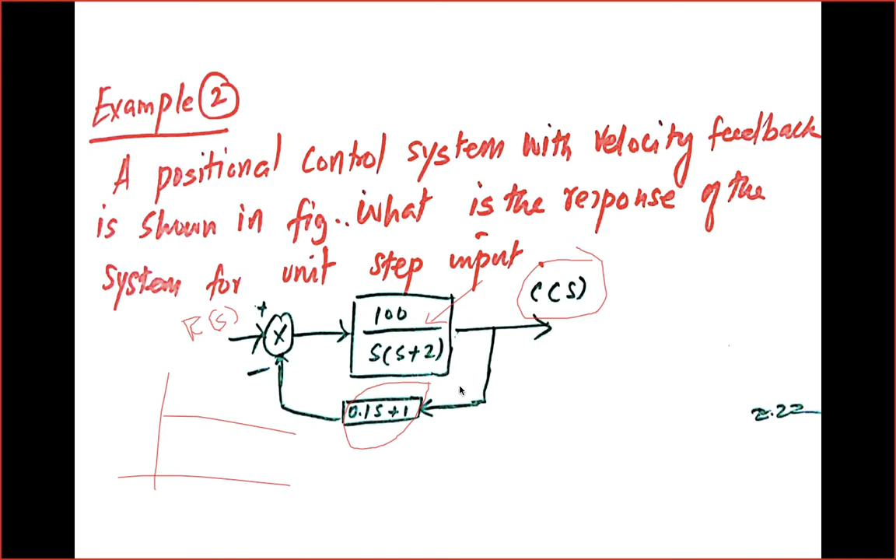So for the closed loop transfer function, we have been using this standard formula. This is the formula to find out the closed loop transfer function for the given block diagram.

So the closed loop transfer function is given by C of s by R of s is equal to G of s divided by 1 plus G of s into H of s. Here G of s is the open loop transfer function and H of s the feedback. So the open loop transfer function is already given in the problem, the block diagram.

G of s is equal to 100 divided by s into s plus 2, and H of s is also given. It is not unity feedback, the feedback is different. Now H of s is equal to 0.1 s plus 1. Now we are going to find out the transfer function, that is, we are going to substitute G of s and H of s in this equation, C of s by R of s is equal to G of s divided by 1 plus G of s into H of s.

When you substitute these two things in this equation, we will get C of s by R of s is equal to 100 divided by s into s plus 2, divided by 1 plus 100 divided by s into s plus 2 into 0.1 s plus 1. This is G of s and this is H of s. So now we need to cross multiply and cancel the common terms.

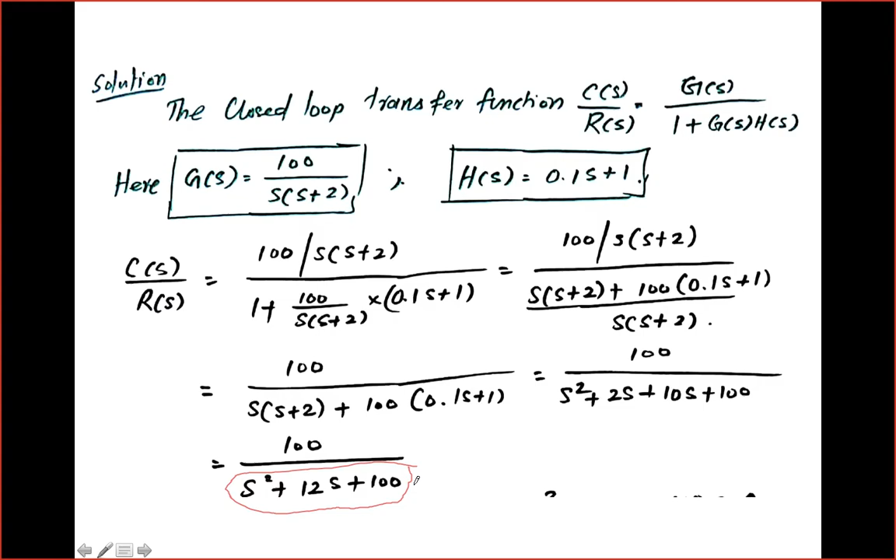Now we need to find out whether it is easily factorable or has complex zeros, how many poles there are, whether the poles are real or complex, etc. Using that we can say something about the system. Now we need to analyze this characteristic polynomial by equating this equation to 0.

So now the characteristic equation, that is the denominator of the transfer function, is s square plus 12s plus 100 is equal to 0. We are going to factor this equation using the standard procedure. We know how to factor a given second order polynomial. So we have two roots, s1 and s2.

For this second order polynomial, we can easily find the roots by using this equation: minus b plus or minus square root of b square minus 4ac divided by 2a. You know what is b, what is a, and what is c. These are the coefficients of the powers of s. So by seeing this polynomial, a is equal to 1, b is equal to 12, and c is 100.

Now we are going to substitute the values of a, b, c in this equation. So minus 12 plus or minus square root of 12 square minus 4 into 100 divided by 2 into 1, which is equal to minus 12 plus or minus square root of 144 minus 400 divided by 2, which is equal to minus 12 plus or minus square root of minus 256 divided by 2.

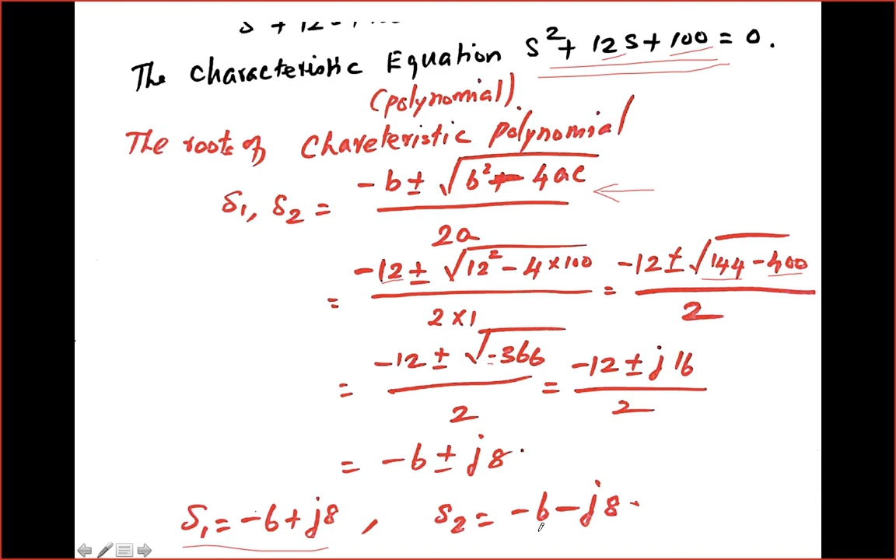From that, when you are dividing this by 2, you will get the roots s1 and s2 is equal to minus 6 plus or minus j8. Hence we can consider s1 is equal to minus 6 plus j8 and s2 is equal to minus 6 minus j8. We have two roots. These two roots are complex. Okay, complex in the sense the system is called underdamped.

If these roots of the characteristic polynomial are complex conjugates, then we can say that the system is underdamped, and so the response of the system will have damped oscillation. So by seeing the roots of the characteristic polynomial, that is the denominator of the transfer function, we can say the system is overdamped or underdamped or critically damped, etc.

Now these roots are complex and complex conjugates. Hence, we can say that the system is underdamped. So the response of the system will have damped oscillation. Now we are going to find out the inverse Laplace transform to find out the unit step response of the system. So now the procedure is the same.

Up to the previous step, we can say the nature of the control system. Now we can use the partial fraction procedure to find the inverse to get the response of the system. So we are going to find out the response when the input signal is a unit step signal. Hence, I am writing the previous transfer function like this.

That is C of s is equal to R of s into 100 divided by s square plus 12s plus 100. I have simply multiplied R of s with this polynomial. That's it. I have rearranged the location of the signal. So initially this R of s was here, that is C of s by R of s. Now we have rearranged, that is C of s equal to R of s into 100 divided by s square plus 12s plus 100. Now we are going to find out the unit step response.

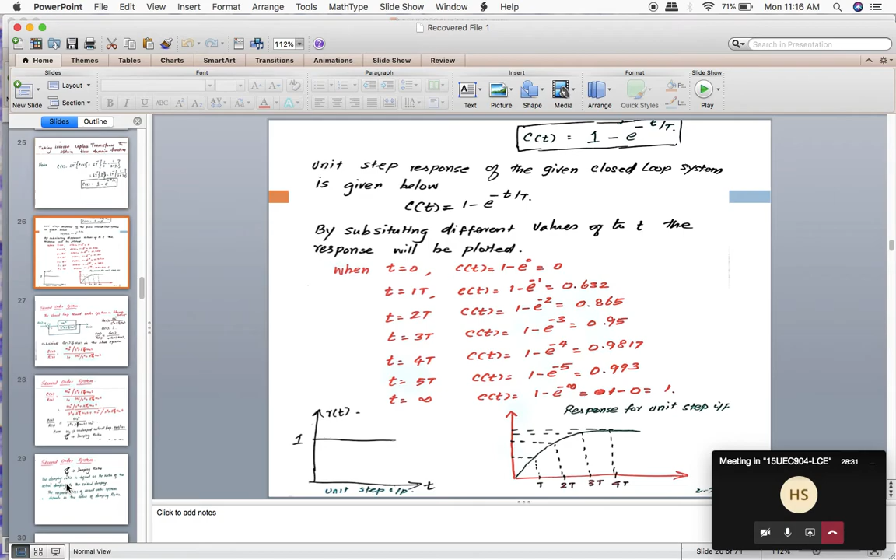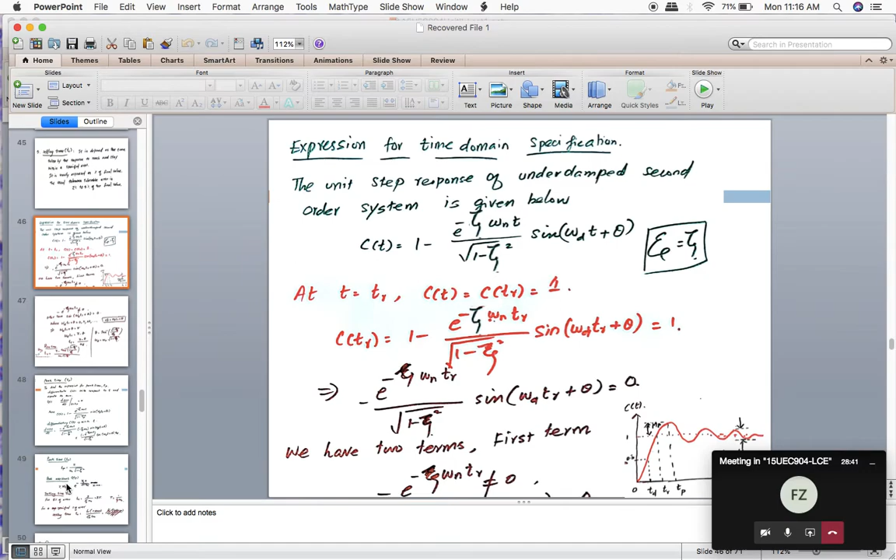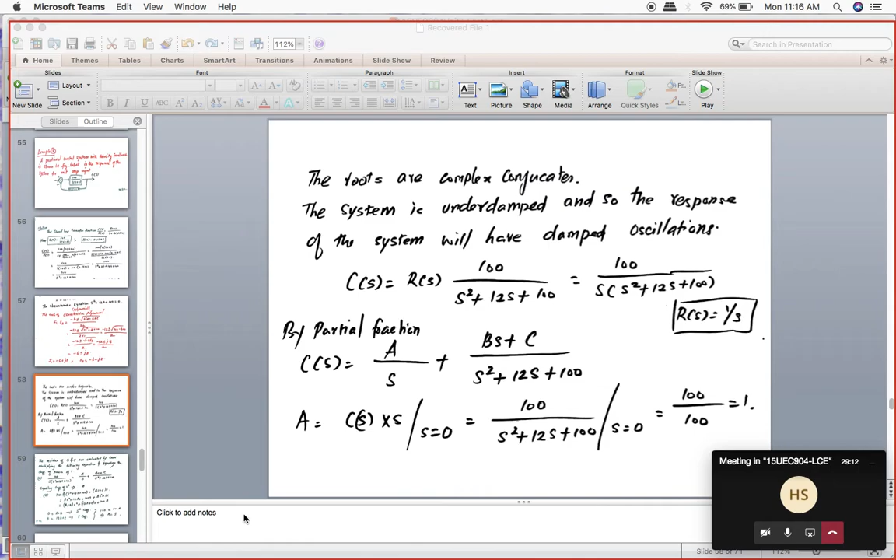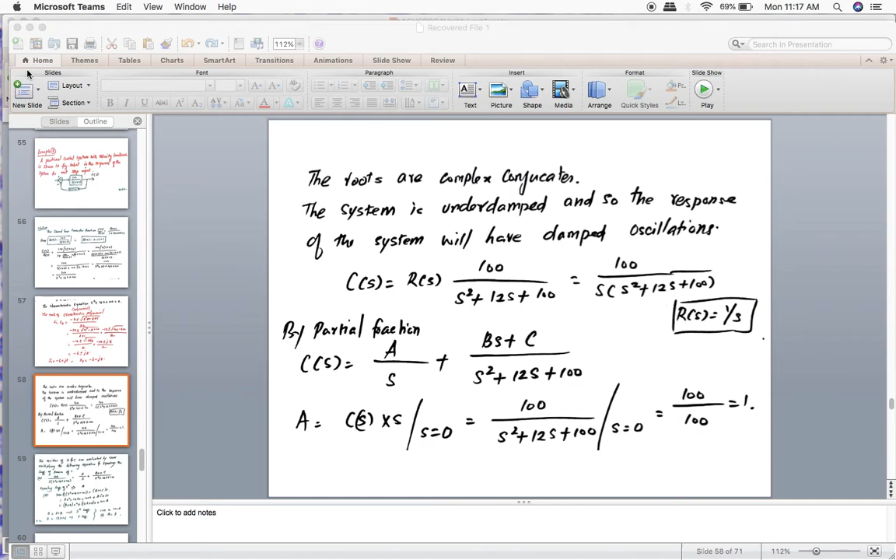By seeing this, somebody can respond to me. Is it visible? Hello? Yes, sir. But here some problem is there. PPT is not working. So just wait for some time. All of you wait for some time. I'll once again load the PPT. Is it visible? Somebody can respond to me. Yes, sir. Yeah. Okay.

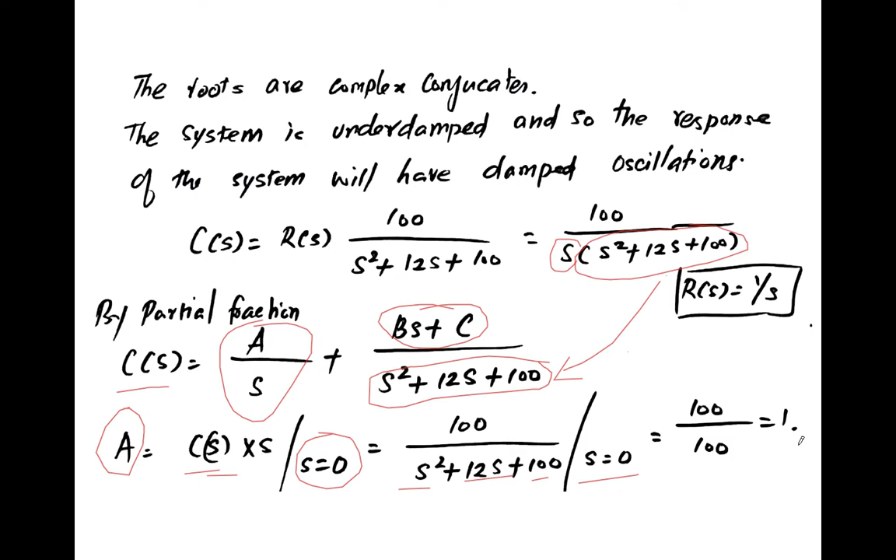Now we need to find out the value of b and c. Here we cannot follow the same procedure to find out the value of constants b and c. Here we are going to cross multiply and equate the coefficients of the polynomial, that is powers of s. Residues b and c are evaluated by cross multiplying the following equation and equating the coefficients of powers of s on the right hand side and left hand side to find out the value of b and c.

So when you are cross multiplying, we can multiply s into s square plus 12s plus 100. The two get combined. So we can cancel these two things.

When you are cross multiplying, you will get 100 is equal to a into s square plus 12s plus 100 plus bs plus c into s. Left hand side 100 and right hand side we have this equation. Now we need to multiply a inside this bracket and s inside this bracket: a s square plus 12as plus 100a plus b s square plus s into c. Now we are going to separate the powers of s.

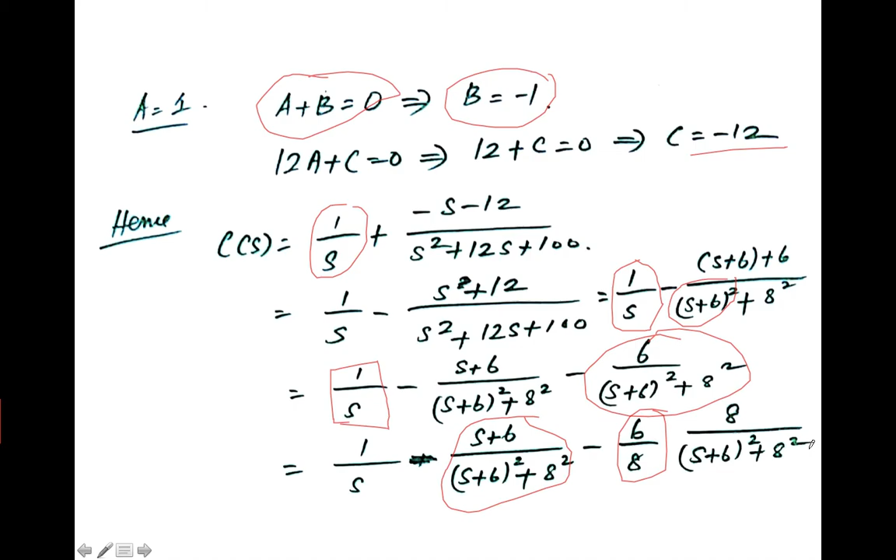For that I am going to again rearrange this by multiplying 8 in the numerator and denominator. So I am rewriting this like 6 by 8 into 8 divided by s plus 6 the whole square plus 8 square. These are all some manipulations to find the inverse Laplace transform. We have to make the polynomial in such a way that it will match with the standard set of equations. Now we are going to find inverse Laplace transform.

So C of t is equal to inverse Laplace transform of C of s. Now we are going to find out inverse Laplace transform of 1 by s, inverse Laplace transform of s plus 6 divided by s plus 6 the whole square plus 8 square, minus 6 by 8 into inverse Laplace transform of 8 divided by s plus 6 the whole square plus 8 square.

So we know that inverse Laplace transform of 1 by s is 1. There is no problem. And this is also standard format: s plus 6 by s plus 6 the whole square plus 8 square. The inverse Laplace transform is e power minus 6t into cos 8t. Similarly, inverse Laplace transform of 8 by s plus 6 the whole square plus 8 square is e power minus 6t into sin 8t.

So in order to find inverse Laplace transform, we have manipulated and rearranged the equation to reduce the burden of taking inverse Laplace transform, and because of that we came to this point: C of t is equal to 1 minus e power minus 6t, taken common outside, into cos 8t plus 6 by 8 into sin 8t. This is the inverse Laplace transform of C of s, that is nothing but the response of the given control system when input signal is unit step signal.

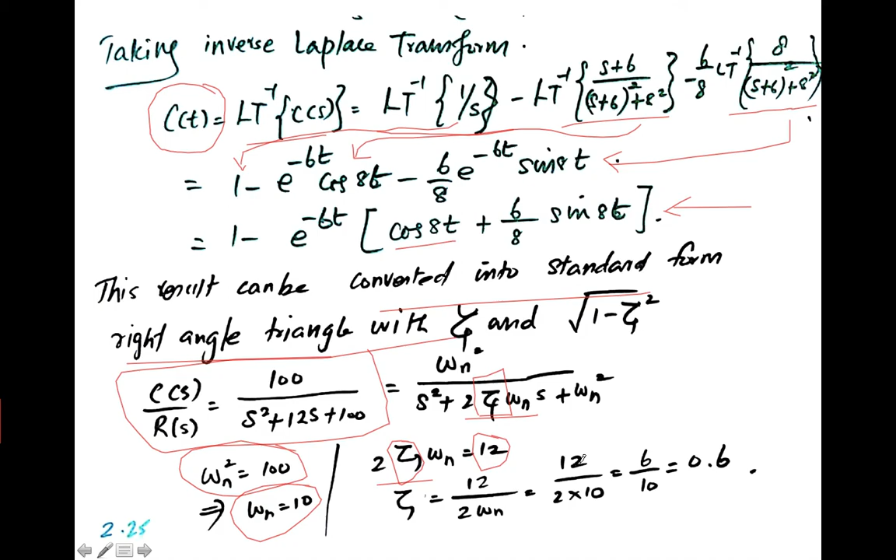Zeta is equal to 12 divided by 2 into omega n. Already we have determined omega n. Omega n is equal to 10. So when you are substituting the value of omega n, we will get 12 divided by 2 into 10, which is equal to 0.6. So we have obtained the value of damping ratio and natural frequency. Now we need to find out other factors to solve the problem. Okay. Now, hope you remember this kind of diagram. This is the right angle.

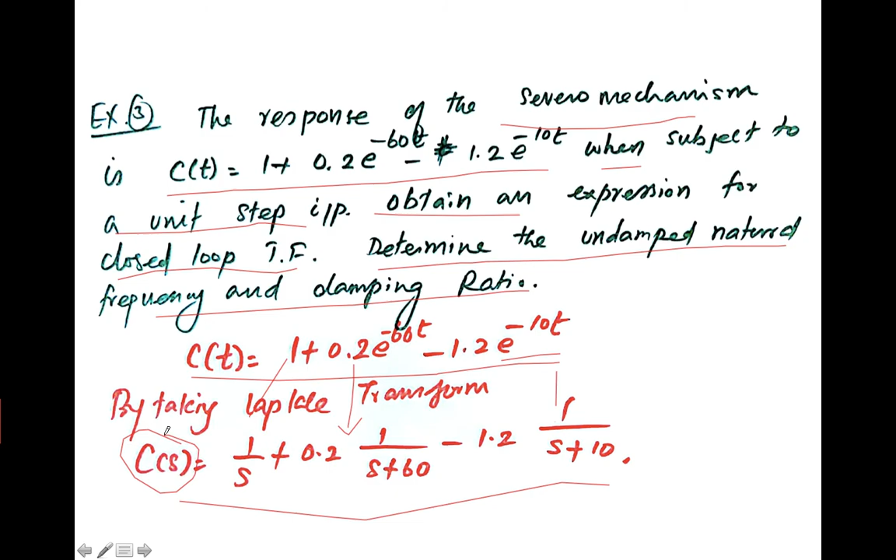So we have to cross multiply and equate this. We have to solve this equation. So when you are cross multiplying, we are going to take all this common, that is, you take this denominator, s into s plus 60 into s plus 10. When you are multiplying all these things, we need to multiply here s plus 60 into s plus 10 plus 0.2 into s plus 10 minus 1.2 into s plus 60.

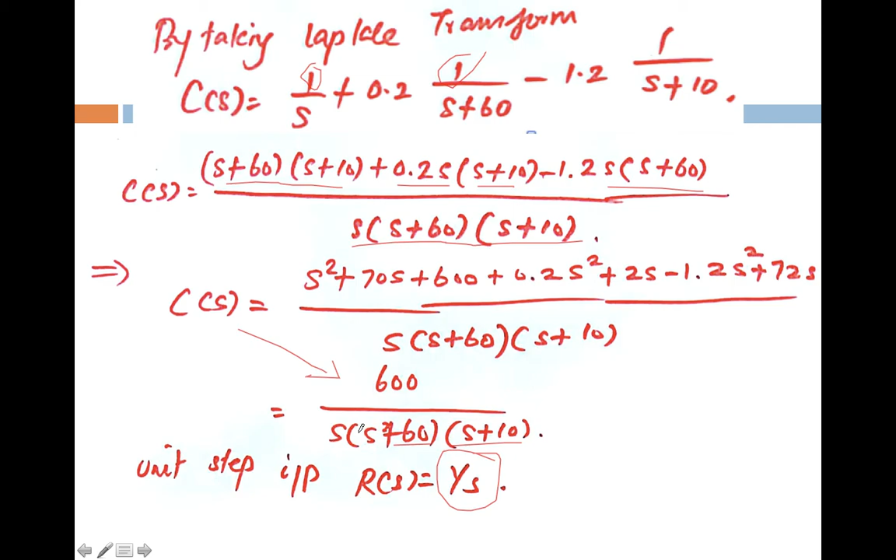Here we know that input is unit step signal, so the Laplace transform of R of s is 1 by s. So here one s is already there. I am going to rewrite the previous equation; we have to substitute 1 by s is equal to R of s. So C of s is equal to R of s into 600 divided by s plus 60 into s plus 10. So we need to find out transfer function.

I am going to put this R of s in denominator of C of s. So C of s by R of s is equal to 600 divided by s plus 60 into s plus 10. So when you are multiplying these two things, you will get s square plus 70s plus 600. So we are going to equate this equation with the standard equation, that is omega n square divided by s square plus 2 zeta omega n s plus omega n square.

When you are equating, you will get the natural frequency, that is omega n square is equal to 600, and when you are taking square root of both sides, you will get omega n is equal to 24.49 radian per second, and damping ratio, that is 2 zeta omega n is equal to 70. So zeta is equal to 70 by 2 omega n. Omega n we have already determined, omega n is equal to 24.49. When you are substituting it, you will get damping ratio zeta is equal to 1.43.

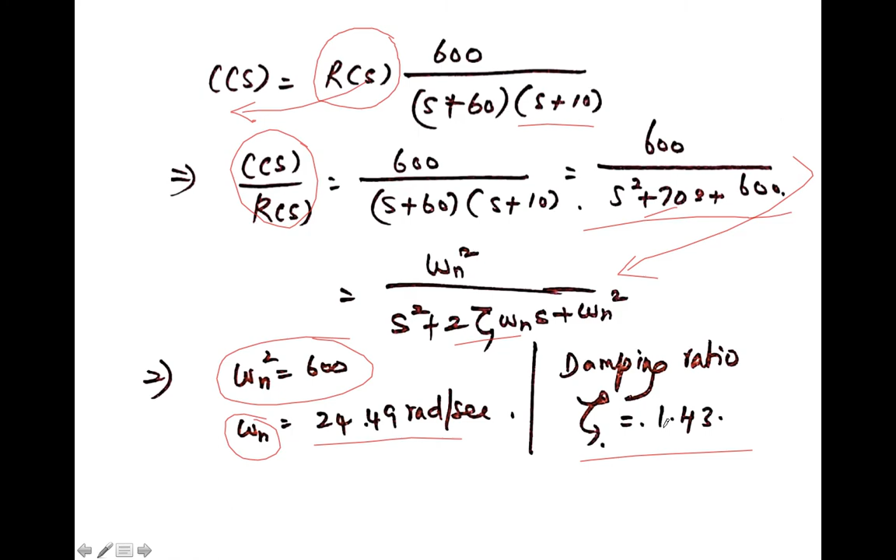Okay, so with this I'm stopping, and I'll start the next problem; I'll just read the problem and stop the lecture. The next problem says a unity feedback system is characterized by an open loop transfer function G of s is equal to k divided by s into s plus 10. Determine the gain k so that the system will have damping ratio equal to 0.5. For this value of k, determine peak overshoot and time at peak overshoot for unit step signal.

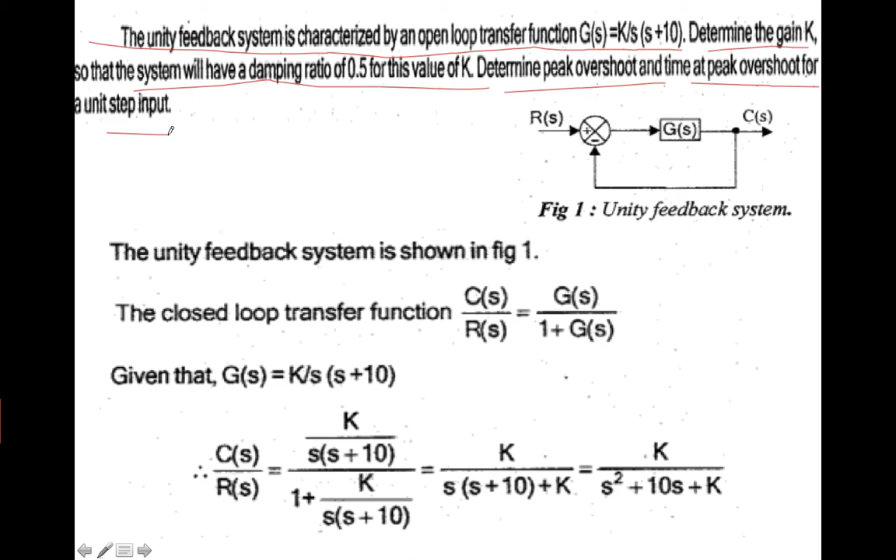So the damping ratio zeta is given. Using this zeta value, you need to find out the natural frequency, that is omega n, and the gain has to be found.

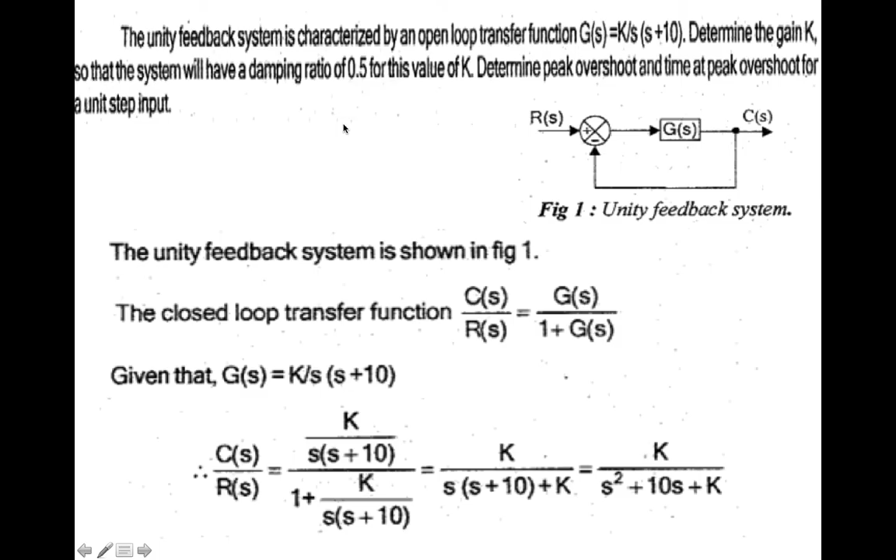Now I am going to take attendance. Just now, some 5 minutes back, I saw the total number present was around 33, but it's showing 31. Okay, I do not know why people are not showing interest in attending classes. Okay, so now I am taking attendance. Attendance has to be taken. Yes, so I have taken attendance. Download attendance.